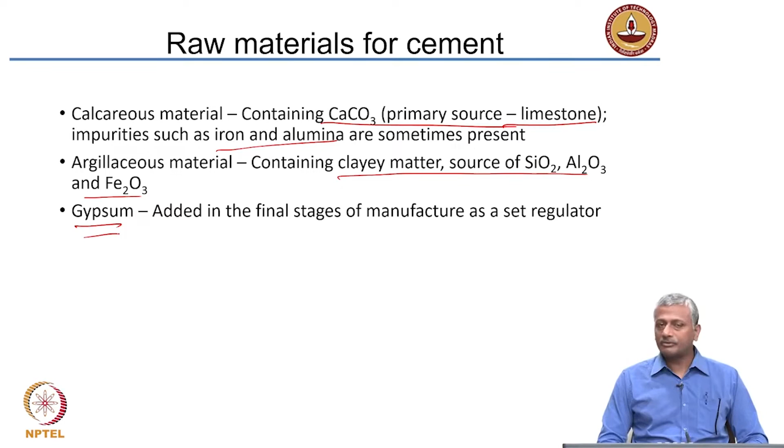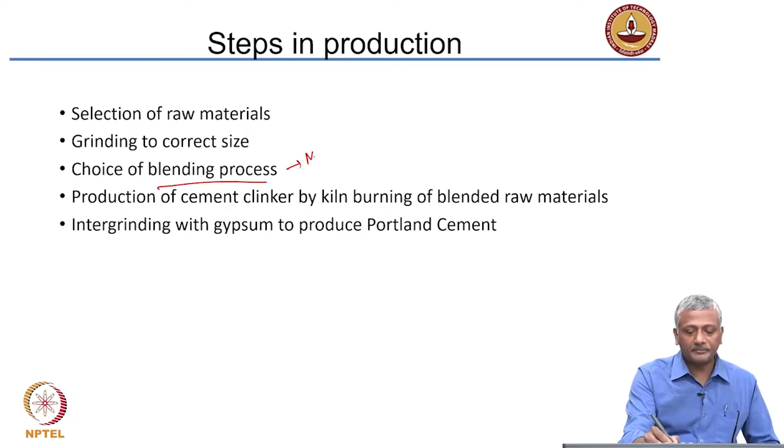So, what are the production processes that are involved? First, of course, you need to select the correct raw materials. You need to break them down into very fine scale powder. After breaking them down into a powder, you mix them or blend them, essentially mixing. You mix the raw materials together and then you burn them in a kiln.

We talked about brick kilns, right. Brick kilns were vertical kilns. You load the material at the bottom, you have the heat and then the gases go out of the top and then you take the material out which has been burnt. But in cement, it is not the same, you go with what is called a rotary kiln. In cement, we produce with a rotary kiln. I will show you a schematic of that later, that will make it much clearer. So, you mix the raw materials together, you burn them together in a rotary kiln.

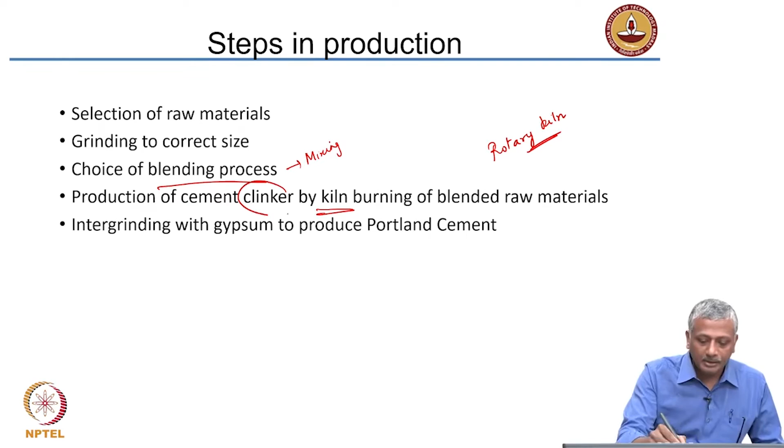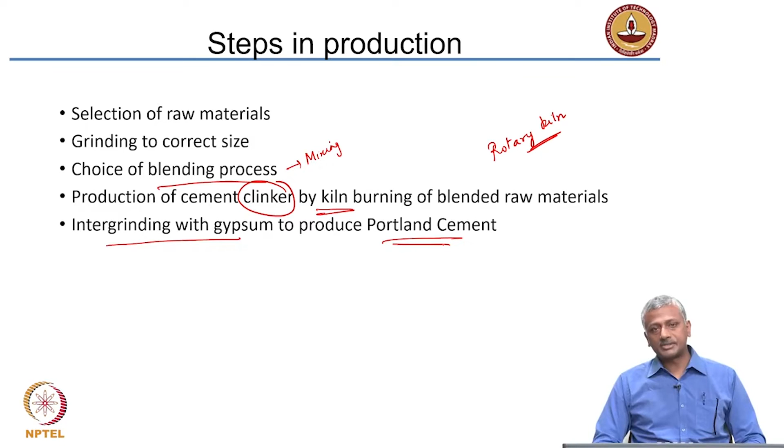That leads to the production of what we call clinker. This clinker comes out of the kiln and is then interground with gypsum to produce your Portland cement. So, gypsum is not put into the burning process. The material that comes out of the burning process, which is called clinker, is ground together with gypsum to produce Portland cement. So, this is basically a schematic that describes your Portland cement production process.

So, you have your quarry from which limestone is getting extracted. After extraction, it goes through some crushing. You have primary crusher, secondary crusher and so on. Finally, you get fine ground limestone, limestone that is of the right size. And that goes and gets stored in silos. A silo is basically a vertical cylindrical structure. You might have seen silos for grain, silos for cement and other materials. So, you store the fine ground limestone in silos.

You also have storage silos which have clay and sometimes sand depending upon the silica content that you want. You do all the proportioning, and sometimes you grind the material together with the limestone and then send it to what we call a preheater. Limestone is extracted from the quarry, and in the quarry the stone is not going to be exactly dry, there will be some wetness in it. So, without spending too much energy trying to drive off this water, you send it to the preheater tower where any extra water in the raw material will get removed. Then the materials blend together properly and are introduced into this chamber called the kiln.

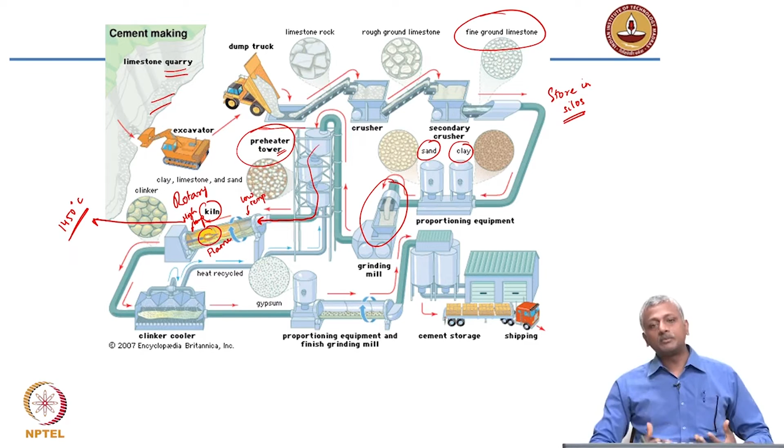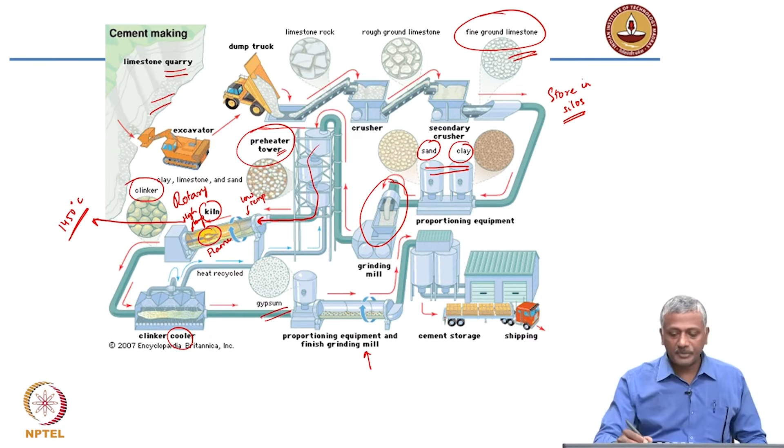And as a result of this burning process, these raw materials, that is clay and limestone, get mixed together and also fused together to form certain compounds, which I'll talk about later. That material comes out as clinker, and that clinker is cooled and then stored, again stored in silos, and then finally it is proportioned along with gypsum and sent to the grinding mill, where it is interground along with gypsum, and then it is extracted as cement. And this cement is again stored in silos and then sent to job sites.

To the job sites, typically cement is sent either in bags or in bulk. In bulk, they are transported through these trucks which are called bulkers. So, depending upon the requirement of a job site, you may want to get cement in bulk or as bags. For residential construction, mostly you will get cement in bags. But if you are supplying it to a centralized mixing plant for concrete, you will be sending a bulker which takes a large quantity of cement and discharges that into the material storage silo at the centralized mixing plant. I will show you those things later.

So, this is the overall process of cement manufacture. The most important part is the raw materials are ground to a very fine size so that they can mix and blend well. Then they are sent to a burning process in which they get fused together to form different sorts of compounds, and then the material comes out and it's cooled and then proportioned along with gypsum to produce the final Portland cement.

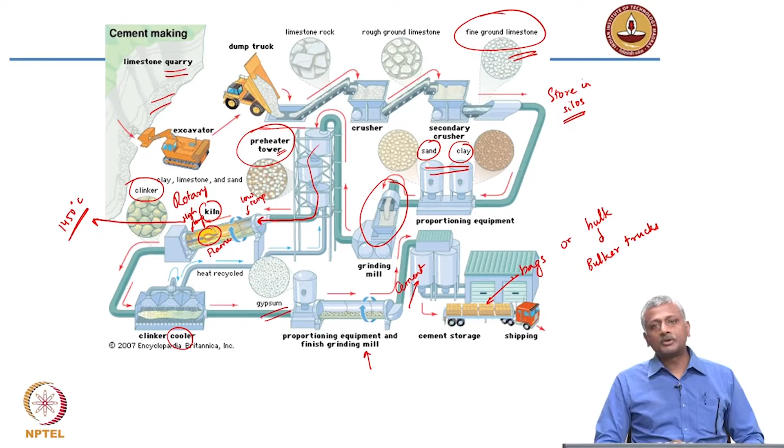So, what are the oxides that are present in the cement itself? From the raw materials, that is limestone and clay, you get the following oxides: calcium oxide, silicon dioxide, aluminum oxide and iron oxide. In a nutshell, cement is a mixture of these four primary oxides. In cement chemistry, calcium oxide is written as C, silicon dioxide as S, aluminum oxide as A, and iron oxide as F. Quite different from regular chemistry, right? C in regular chemistry would mean carbon, but here we are talking about calcium oxide.

There are also other oxides present depending upon the raw materials, like magnesium oxide, sulfur trioxide, sodium and potassium oxides. Sodium and potassium oxides are called alkali oxides. Then you may also have other minor oxides which do not really have a bearing on how well the cement works. Now, you have all seen that cement appears grey in color. Why is that? It is because of iron oxide in the cement and the kind of atmosphere inside, called a reducing atmosphere.

Now, as I said, in the kiln burning, the raw materials mix and fuse to form four primary compounds. C3S is a mixture of calcium oxide and silicon dioxide, written as C3S to mean 3 parts of calcium oxide and 1 part of silicon dioxide. C2S is 2CaO·SiO2. C3A is 3CaO·Al2O3, and C4AF is 4CaO·Al2O3·Fe2O3. Very complicated, because these compounds do not represent actual stoichiometric compositions of the materials inside cement.

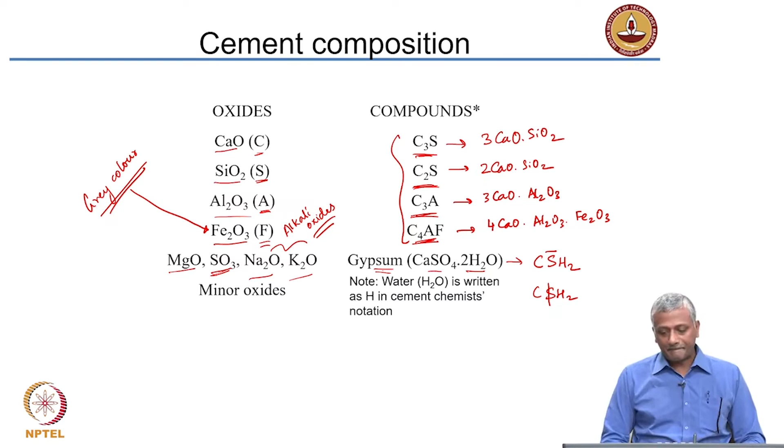How much of these compounds are present inside the cement? Typically, when you think about modern cement, most of it is C3S. Nearly 50% or more than 50% is C3S. And there is a reason why this is so. I'll come to that in just a minute.

Apart from C3S, as I said, you have C2S, which is typically about half or less than half of C3S. Then you have C3A and C4AF, which are much smaller quantities. If you combine the C3S and C2S together, it will be nearly 80% of your cement. And of course, the remainder will be made out of your aluminates and gypsum. So, nearly 80% of your cement will be a mixture of C3S and C2S. So, primarily your cement is calcium silicate.

We talked in the last chapter in stone, brick and mortar about hydraulic lime, right. Hydraulic lime is basically produced from burning of impure limestone. Again, that leads to the formation of calcium silicates. It forms smaller forms of calcium silicate. Here it forms larger forms of calcium silicate like C3S and C2S.

So, what do these compounds basically impart to the cement? We will take a look at the reactions and the chemistry in just a few minutes. But what does the resultant cement have in terms of its basic physical properties? So, the specific gravity of the cement is 3.15.

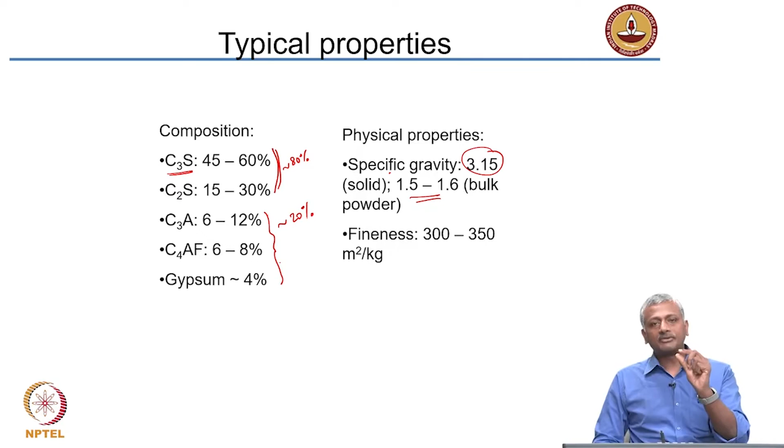Fineness of cement is expressed typically in terms of a surface area. So, if you take 1 gram or 1 kilogram of the cement and you were able to measure all the surfaces of the cement and represent that as a surface area, that is what is called a mass specific surface area. So, if you take 1 kilogram of cement, the mass specific surface area would be 300 to 350 square meters. So, the fineness would be in the range of 300 to 350 square meters per kilogram.

So, what happens when you mix the cement with water? You might have seen what happens when you mix lime with water. It rapidly reacts with water and converts to calcium hydroxide. Now, cement on the other hand has a controlled reaction with water. Nevertheless, the reaction of cement with water is also exothermic. It releases heat, and this heat released is called the heat of hydration. So, the entire process of reaction of cement with water is called hydration.

Now, what happens in this hydration is that you have these cementitious compounds, that is C3S, C2S, C3A and C4AF, and along with calcium sulfate that is coming from gypsum, they interact together and produce a certain set of compounds. We will talk about those in just a minute.

Now, if your reaction is faster, you evolve more heat rapidly. You can look at it in two ways. One is your heat is getting evolved rapidly caused by a very fast reaction, that means your setting and strength gain of the cement will be much faster. But at the same time, if you are releasing a lot of heat very fast, then your potential for cracking is also more. So, you have to be very careful about how you control the rate of reaction of the cement.

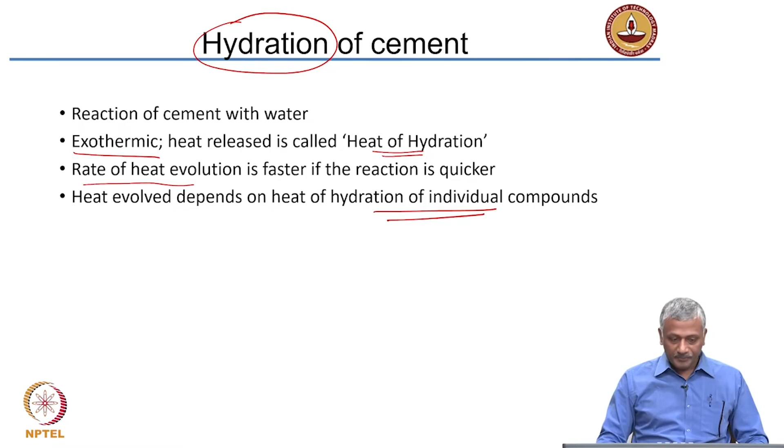That is why we want to add gypsum to take care of C3A, otherwise the C3A will go crazy. Without gypsum it will go crazy. So, you want this gypsum to be there to regulate the rate at which C3A reacts. But nevertheless, the interaction between gypsum and C3A still gives rise to some early strengthening and setting of the cement. But as I said, your cement is mostly C3S because it contains more than 50% of C3S.

So, C3S also is responsible for early strength gain. That is why we want more of it, so that we can gain strength early. In most modern construction projects, we want to finish fast and go to the next stage. So, for the concrete to be able to gain strength fast, the cement should also be rapidly strength gaining. So, the compound that is primarily responsible for the high early strength of the cement is C3S.

So, if you want early strength gain in cement, you want a cement with a high C3S content, and of course, it does not come without any price. You have to pay a price for it. It possesses a high heat of hydration. That means it evolves heat rapidly and the potential for cracking could be significant.

On the other hand, when you have a cement which is rich in C2S, dicalcium silicate, it is very slowly reacting and it has a low heat of hydration. So, it will possibly not even react in the first few days of cement coming in contact with water. So, your C2S reaction may actually start very late and it is responsible for the long term strength of your concrete. It will slowly be reacting. As long as there is water available, it will continue to react and provide strength over the long term.

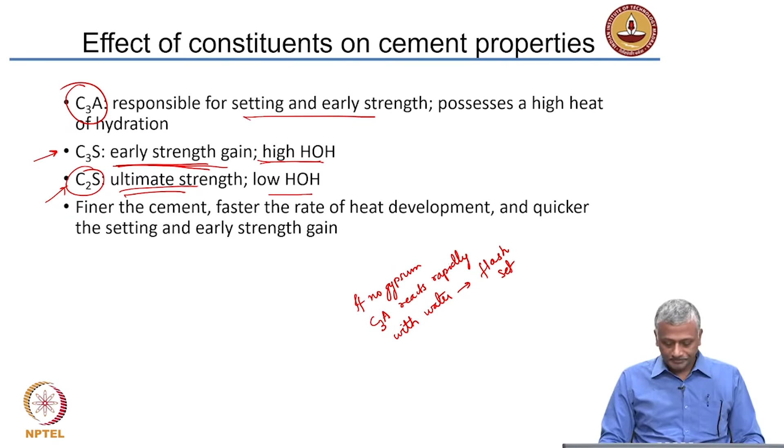Now, what does the reaction of cement with water produce? The calcium silicates obviously have to produce some calcium silicates. The calcium aluminates have to produce some calcium aluminates. So, let us see what it produces. The calcium silicates basically end up in producing calcium silicate hydrate, CSH, and calcium hydroxide. They produce solid components called calcium silicate hydrate and calcium hydroxide. Both these solid components fill up the volume that was previously occupied by water.

So, if I show you a picture of cement particles in water at time t equal to 0, right? The cement particles have come in contact with water, and slowly what is going to happen? The reaction products are going to start forming on the surface of the cement particles, right, and then occupy the space which was previously occupied by water. So, in other words, as reaction proceeds, the space previously occupied by water gets filled by the products.

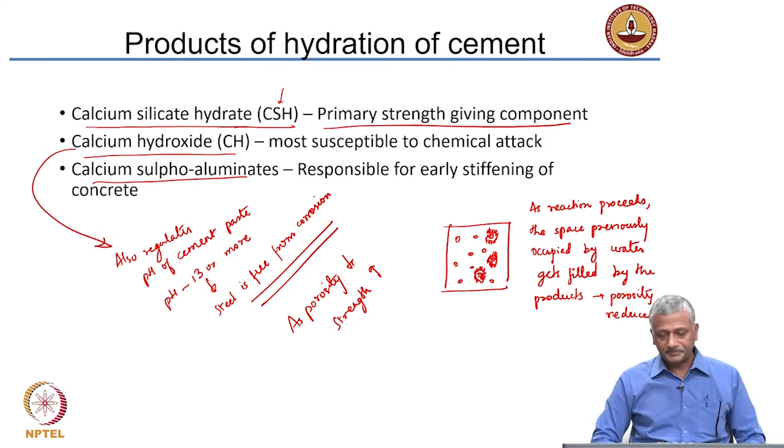Okay, so now you understood what the chemistry of cement is, how the compounds of cement actually react. What happens when cement comes to a job site? How is the quality of this material ascertained by the contractor or the person who is actually doing the application of the concrete? You need to do some basic laboratory investigations to understand the quality of the material that has been received on site. So, for that, of course, the Indian standards give you the guidelines as to the tests that you need to do.

The important tests that are required for cement analysis are the test of consistency and setting time, which is done with the help of a Vicat apparatus. Many of you will have this test in your laboratory classes in your further semesters. So, you have to determine what is called initial setting time and final setting time. What do you think is the importance of initial and final setting time?

Now, you know that when the concrete is first prepared by mixing water into it, cement and water come into contact, the concrete is still very fluid. You have some time within which this concrete can be taken and put into the formwork and then consolidated and finished on the top surface. So, there is some amount of time that you get to actually complete all the operations. After you place it in position, it slowly starts stiffening and gaining strength. Beyond that point, you will not be able to rework the concrete.

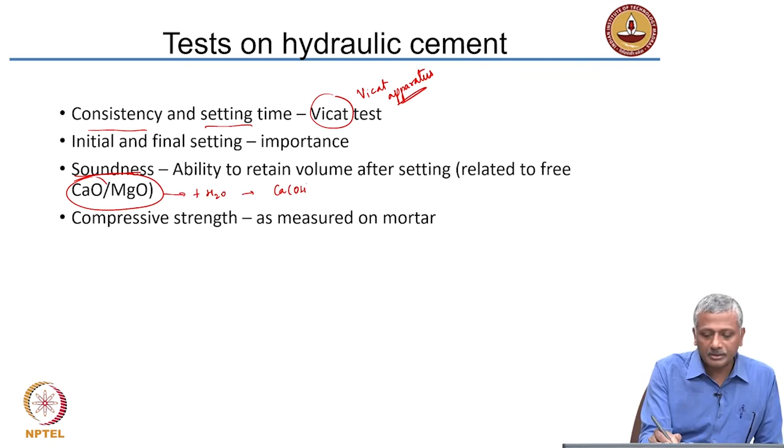Okay. The other important characteristic that you want to test on your cement is the soundness. Now, sometimes because of the nature of the raw materials and the nature of the process which manufactures the cement, you may have free calcium oxide or magnesium oxide that is present inside your cement. What will happen is, when this reacts with water, it can lead to the formation of calcium hydroxide or magnesium hydroxide, and that may lead to increase in volume.

So, in a set cement paste, if you have too much excess of this free lime or free magnesia, the increase in volume will lead to cracking. That is what is called unsoundness. So, that needs to be properly checked. Okay. So, soundness is the ability to retain the volume. Unsoundness means that after setting the volume is increased. So, you do not want that volume increase to be uncontrolled, otherwise your cement will not be usable.

Okay. Then you have to measure also the strength of the cement. In real life design, when engineers are working on site with concrete, they will only be worried about the strength of the concrete. That means the strength that they get from the composite material, that is inclusive of water, cement, sand and stone. But to ensure that the cement is of right quality and will produce the desired effect in concrete, we also have to test all these characteristics, and finally we also need to test the compressive strength

of the cement. Now, interestingly, the compressive strength of the cement is not measured on just a mixture of cement and water, it is measured on mortar. That means it has got some part of water, cement and the sand. Why do we want to use mortar to determine the strength of the cement? It is something that you should think about.